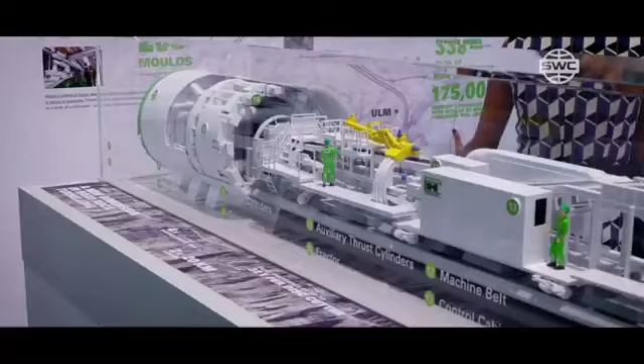Even the smallest business is a very serious and responsible process. In a small business that has been thought through to the smallest detail, there always arise situations that change the course of events and disrupt the plans. Say nothing of medium and large businesses, which consist of a thousand little things that should be developed and managed in a planned and purposeful manner.

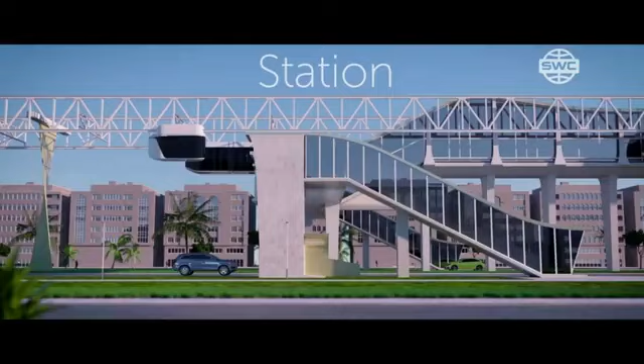In 2015, Unitsky String Transport existed only in the scientific works of its creator. Implementation of the technology into life began with a startup under the Skyway brand, in which few people believed at the time. Today, in 2022, Unitsky String Technologies Inc. is an international engineering company that designs, builds, and maintains innovative flyover transport solutions.

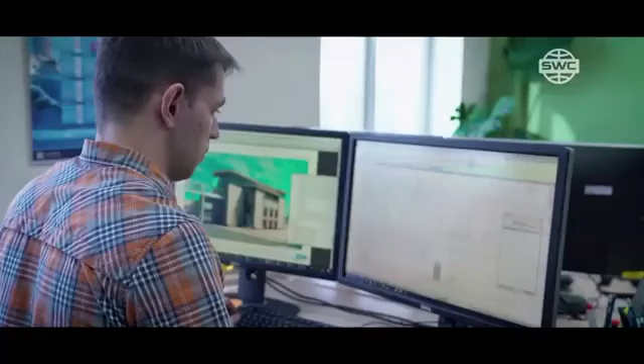The company is headquartered in Minsk, Belarus. It has its own development centers, production facilities, as well as two testing sites in Marina Gorka, Belarus, and Sharjah, United Arab Emirates. More than 700 specialists of various profiles, engineers, constructors, planners, designers, technologists, logisticians, builders, economists, and others work here. They are professionals with excellent education and experience of serious projects.

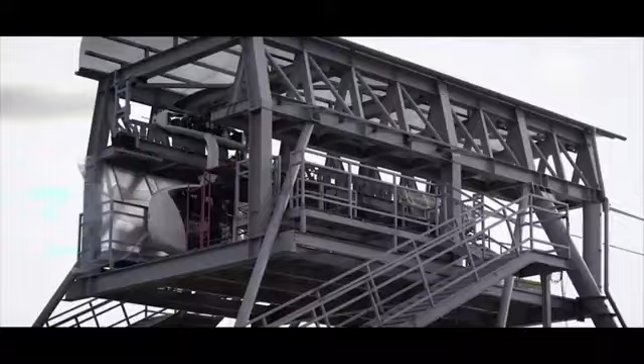Let us now go back to the recent past in order to understand how the company worked under the conditions of the pandemic, and see how it works now under the conditions of sanctions for the Republic of Belarus.

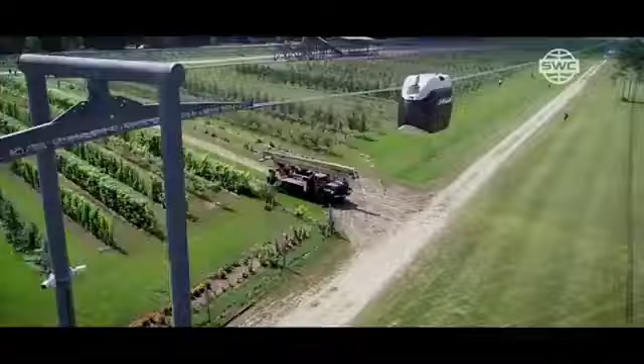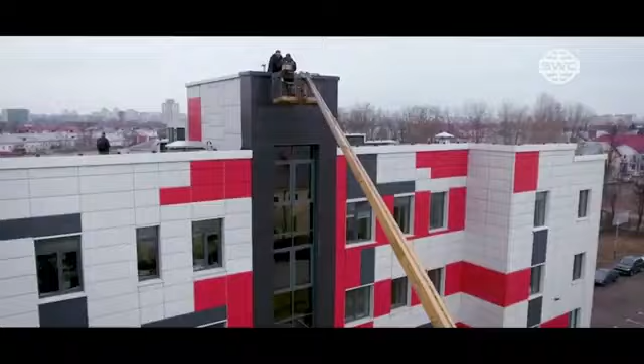Let's agree that 2021 wasn't a happy year for the world, and many medium-sized businesses closed down, including a number of those that were suppliers to Unitsky String Technologies Inc. It should be noted that the company is tied to suppliers in dozens of countries, who supply high-strength wire, high-strength steel, various polymer materials, equipment, and other component parts. That is why we had to look for new companies and new suppliers.

Some deliveries were delayed for a year, and even a year and a half. In the prevailing circumstances, the company's management has carried out an optimization to keep the team and retain its most valuable staff.

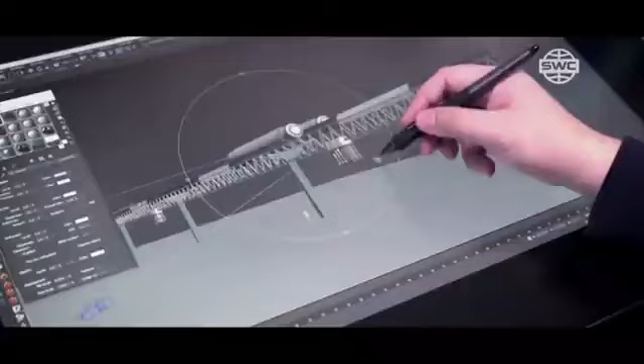Unitsky String Technologies Inc. did not only make money from the string technology before, it has also continued to do so under the conditions of the pandemic. The manufacturing company has a strong production facility, so Unitsky String Technologies Inc. acts as a contractor for external companies from various countries. This helps to finance the technology, support the team, pay salaries, and so on.

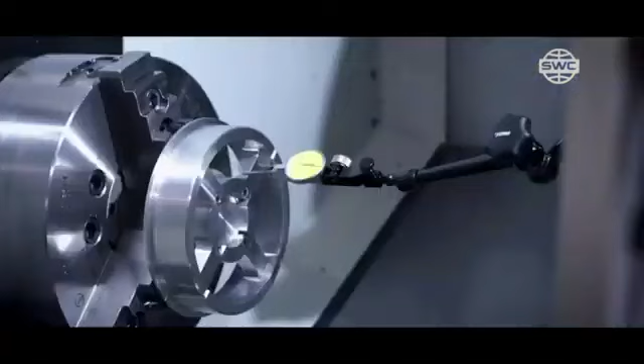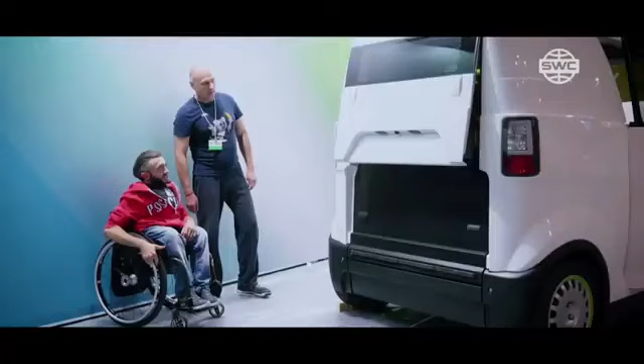As an example of the products that Unitsky String Technologies Inc. manufactures on site, we can mention an order for an electric car that was designed by a large Russian car manufacturer, but they could not produce it. That quite expensive order was placed with Unitsky String Technologies Inc. The customers were amazed at the high quality of workmanship. This electric car was presented to Russian President Vladimir Putin.

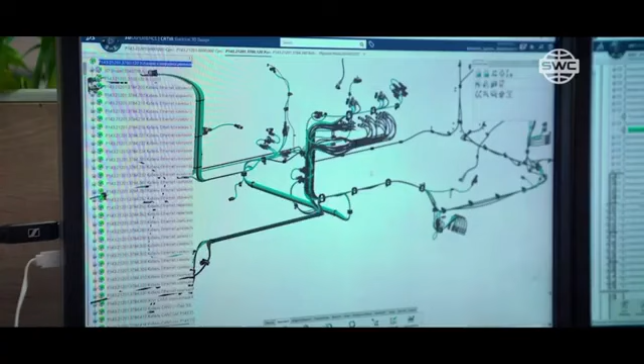The company also has a fairly large design department, and its specialists design buildings and structures at customers' orders. Thanks to outside orders, the financing of the team at String Technologies Inc. does not depend on investments. The team earns its own money.

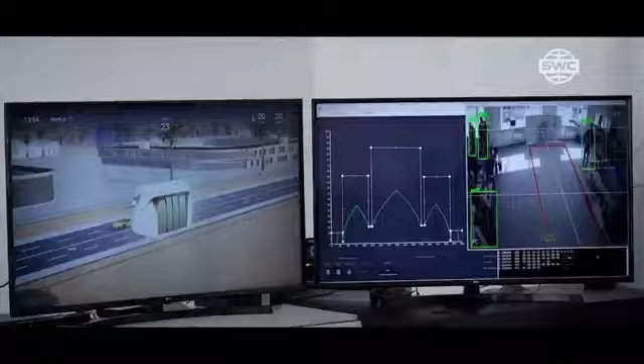According to Anatoly Eduardovich Unitsky, orders are numerous, worth millions of dollars. "We have survived in this madness, and what's more, we are developing, improving, and growing," said Unitsky.

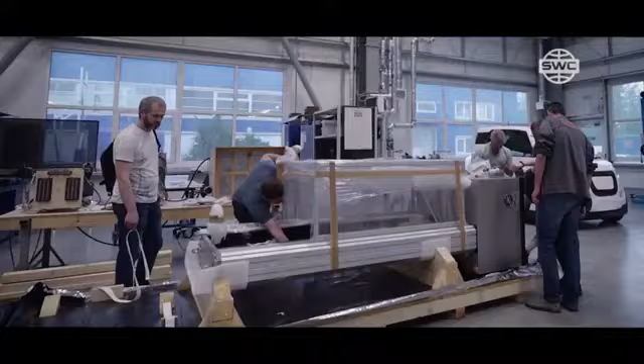All this is being done in order to achieve the main objective: to bring the technology to the global transport market. For six years in a row already, the company developer annually publishes the results of its own economic activity on its official resources. Last year was no exception, as can be seen in the publicly available documentation.

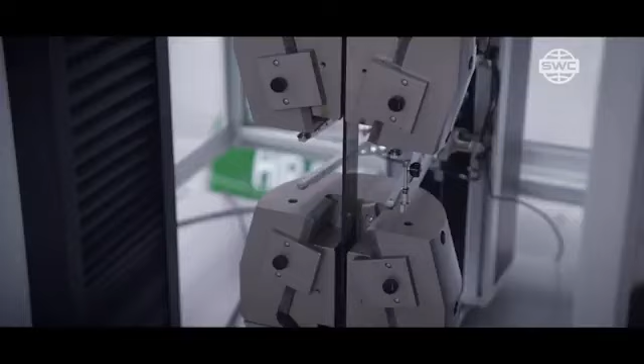According to the auditor's opinion, the attached financial statements of String Technologies Inc. fairly present, in all material respects, the financial position of the company, as well as the financial results of its operations, and changes in its financial position for the year, in accordance with the legislation of the Republic of Belarus.

An important development was the news from the Belarusian Chamber of Commerce and Industry, BCCI, that Unitsky String Technologies Inc. has been included in the Register of Business Entities. Membership in the Belarusian Chamber of Commerce and Industry is evidence of the company's reliability and stability, which is a strong recommendation in business circles in Belarus and around the world, thus increasing the company's opportunities.

Unitsky String Technologies Inc. also announced the completion of its rebranding, launched in 2020. The main reasons for which were a new stage in the development of the string technologies and the company's entry into the world market, as well as a return to its terminological and technological origins. The new company brand in English is Unitsky String Technologies Inc., formerly Skyway Technologies Co. until 2020. It combines both the original name of the technology and the last name of its author.

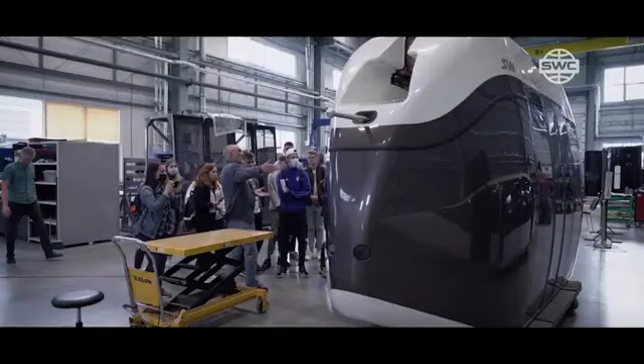Incidentally, it was all stipulated in the charter of Skyway Technologies Co. when the company was founded back in 2015.

Modern trade relations involve the obligatory promotion of goods and innovative technologies. For this purpose, several dozen, sometimes hundreds of trade exhibitions are held each year in every country.

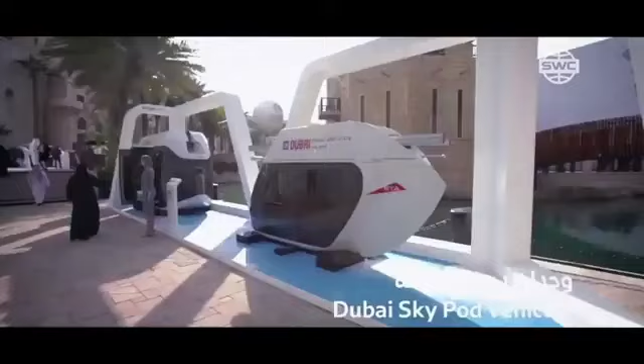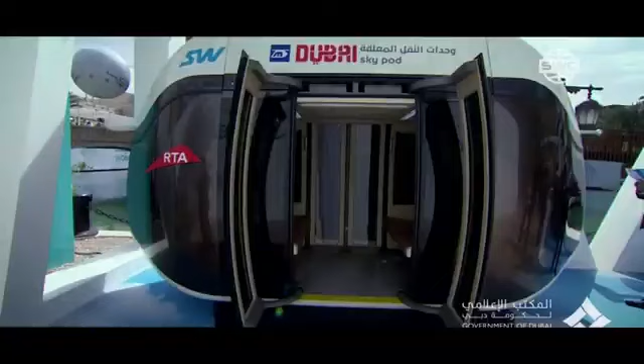At the end of 2021, the string transport was presented at Expo 2020 in Dubai, followed by a number of high-level government and business representatives from different countries visiting the Skyway Innovation Center in Sharjah. These include delegations from the United Arab Emirates, Saudi Arabia, the Dominican Republic and the Republic of Haiti, Nigeria, El Salvador, Colombia, the Czech Republic, Vietnam, Russia, Brazil, Switzerland, Rwanda, and other countries. It is possible that during some of these visits, commercial projects have been agreed upon which the public will find out about later.

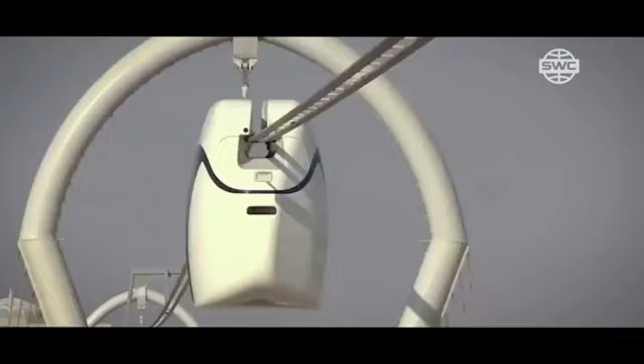New Delhi hosted the major international technology exhibition Smart Cities India Expo 2022. Unitsky String Technologies Inc. participated in this large-scale event, presenting an unmanned and environmentally friendly string transport that is most relevant to today's requirements. Companies from India, China, Singapore, USA, Brazil, France, Sweden, Germany, and many other countries also exhibited at the exhibition.

Major trade exhibitions attract almost all major customers and manufacturers, and this offers great opportunities for exhibitors.

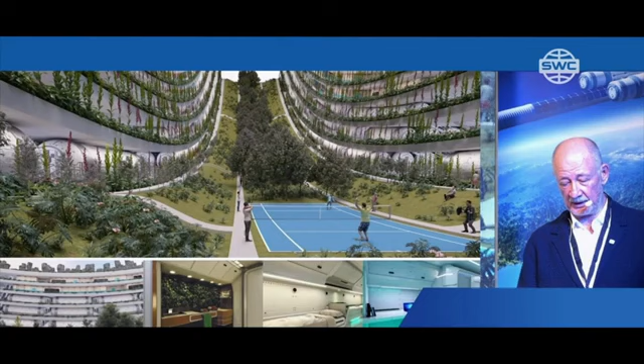Another important event took place in Mariina Gorka, where the 4th International Scientific and Technical Conference Rocket-Free Industrialization of the Near-Earth Space: Problems, Ideas, Projects was held, which gathers scientists and researchers from engineering, environmental, biological, social, economic, and political fields, whose developments contribute to the active development of outer space.

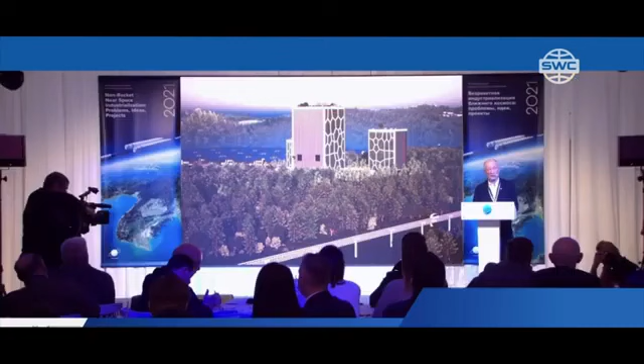The event was organized by companies Astro Engineering Technologies and Unitsky String Technologies Inc. The scientific partner was the Belarusian State University of Transport. The conference was attended by delegates from Belarus, Ukraine, Russia, Great Britain, Germany, Canada, United Arab Emirates, Saudi Arabia, and other countries.

At this conference, there took place a premiere of the film Video Message of Anatoly Unitsky to the leaders and peoples of independent nations.

Scientists are sounding the alarm. In the near future, the limits of population growth and biosphere carrying capacity will be reached on planet Earth. As an alternative to the coming collapse of human civilization, some suggest exploring Mars, while others suggest reducing the world population to a golden billion.

However, Belarusian engineer and inventor Anatoly Unitsky proposes an alternative solution: to carry out rocket-free industrialization of near space by the middle of the 21st century and to move there all ecologically dangerous parts of the Earth's industry. The film is stunning and leaves a lasting impression on all who watch it.

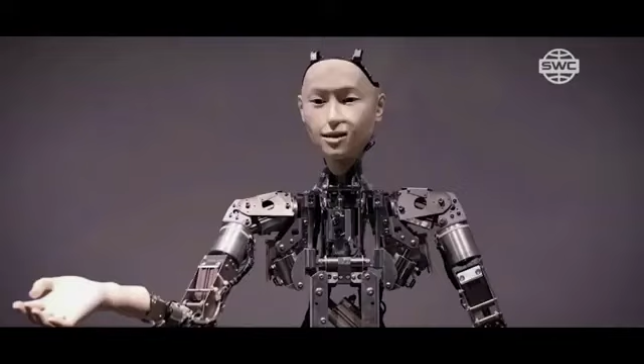The company developer of the string technologies is keeping investors informed about the active development of the Middle East branch, which is at the forefront of commercialization of the project.

Last autumn, the developer of the String Technologies was able to rejoice everyone with the long-awaited news. The reputable international certification body TÜV-SW Standardization Certification issued a certificate of conformity, confirming the safety of innovative infrastructure solutions for the string transport.

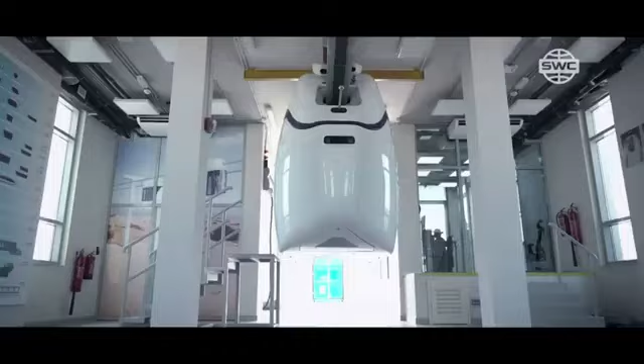As part of the certification of the first test track, this organization recently completed a comprehensive safety certification of all components of the string transport and infrastructure. Not just the rolling stock, but also all structural elements, such as the track structure, stations, and supports.

In doing so, the two anchor supports simultaneously comprise a service station and a passenger station. The fact that the technology was certified as a complex has been cited by Unitsky as one of the major achievements of 2021.

More recently, the construction work on the freight and passenger station and the freight and passenger terminal has been completed, which means that the longest and most time-consuming construction phase of the fourth test track at the String Transport Testing and Certification Center in Sharjah has been completed.

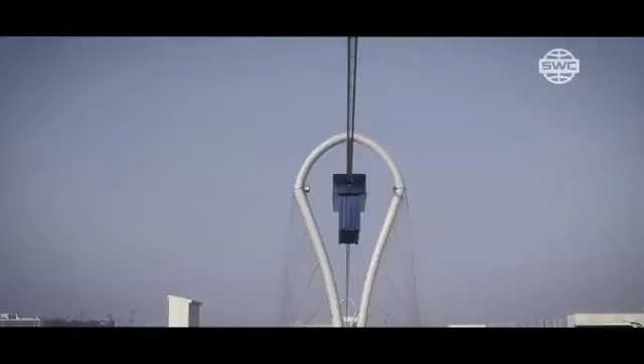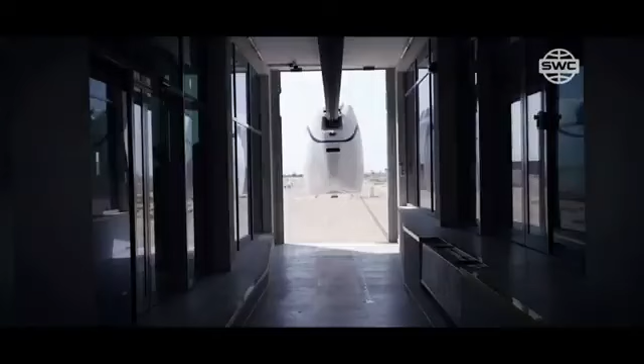Construction work continued for several months, during which time over 2,000 cubic meters of heavy concrete were poured into both stations, and over 300 tons of high-strength steel reinforcement were installed. The freight and passenger station and the freight and passenger terminal are structurally important elements of the string transport and infrastructure complex, combined with the 2.4 kilometers anchor supports of the freight and passenger track for the suspended rolling stock.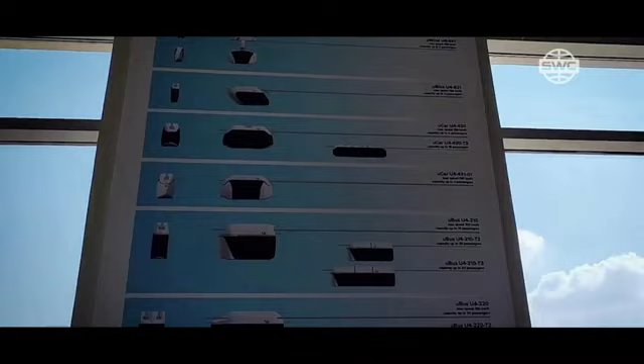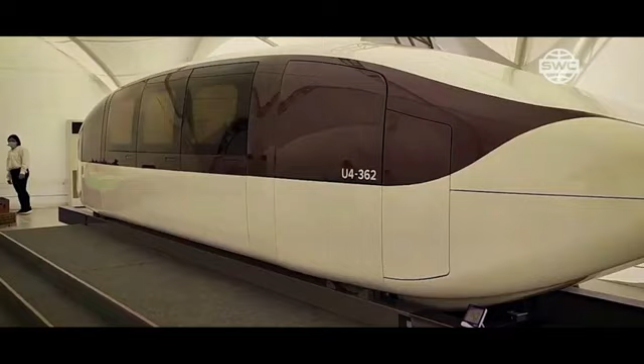They are designed and built to support passenger and freight transport. Unitsky String Technologies Inc. offers the transport market an already tested complete product ready for daily operation in tropical conditions, comprising of a string rail flyover, passenger stations, dispatch room, power supply, communication and automated control systems, passenger and freight trains in tropical design.

Blockchain technology is being actively implemented to link control, ticketing, traffic, monitoring and safety systems of the string transport.

In his New Year's interview, Anatoly Unitsky said that 4 contracts had been signed. There is a confidentiality agreement with the customers that they would like to announce these projects themselves, so no specific countries have been announced yet. All we know is that they will be placed in Asia, Arab countries, and the Eurasian continent.

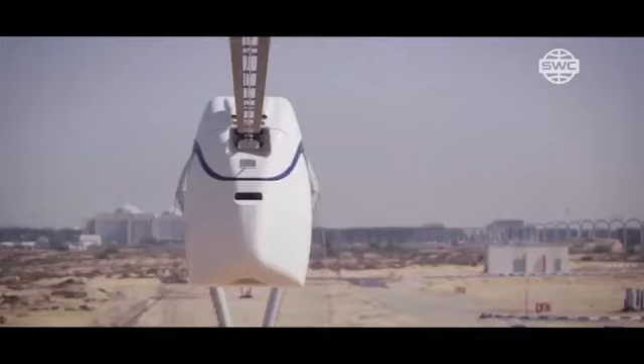The projects are there and are already being paid for. Work is now going on business plans and pre-project studies. The contracts will be announced when the company reaches the design stage.

The developer of the String Technologies is constantly working to improve its transport and infrastructure complexes. Tests are carried out regularly. The company's experts are working on improvements and are now working on the 5th generation to enter the market with it. Better, faster, higher quality, cheaper is the developer's main goal.

The Unitsky String Technologies group of companies include a number of companies, 3 of which are located in the United Arab Emirates. One of them is a marketing company, or to put it simply, a sales office. This company is new, although it has been in the management's plans for a long time.

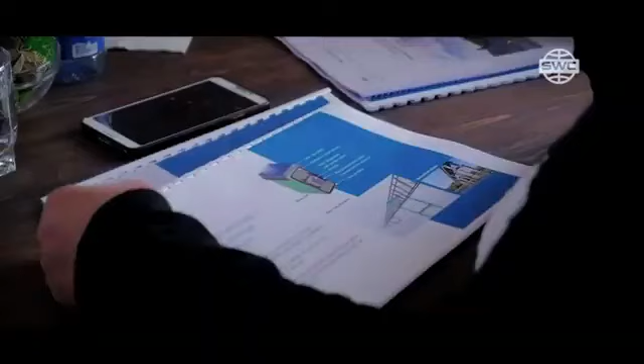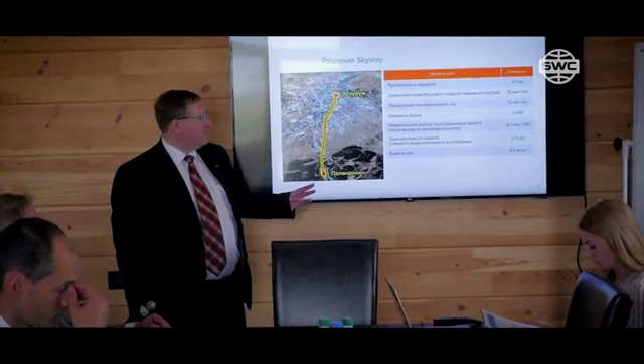In the United Arab Emirates, the tax policy is very different. There, the value-added tax is only 5%. There is no payroll tax, no profit tax. If you take all orders for the company Unitsky String Technologies Inc., you have to pay high taxes on profits.

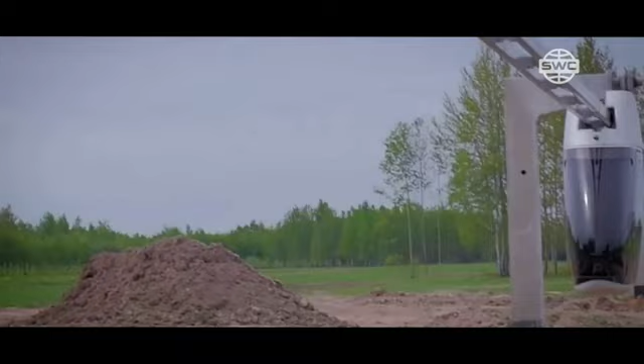In light of recent events, there have been problems with depositing money. To withdraw money and pay investors abroad is almost impossible here. The sales office in the Emirates faces no such problems, and from the point of view of investment attractiveness, it is very

advantageous. The company's management is not just thinking about today, but calculating all options, preparing a solid foundation for business and investors for years to come.

The development of the string transport company developer continues as planned. That was announced by Nadezhda Kosareva, CEO of Unitsky String Technologies Inc. Here is her quote: "The project continues to develop.

We have already purchased the necessary materials, which are enough to complete all the planned works in Belarus for this year. Any possible supply disruptions will not be a problem for us. In its turn, there are no supply problems in the United Arab Emirates either. All the agreements with our partners remain in force."

As we can see, the project is continuing to develop despite everything. This is due to well-thought-out management, coordinated teamwork, and the support of investors.

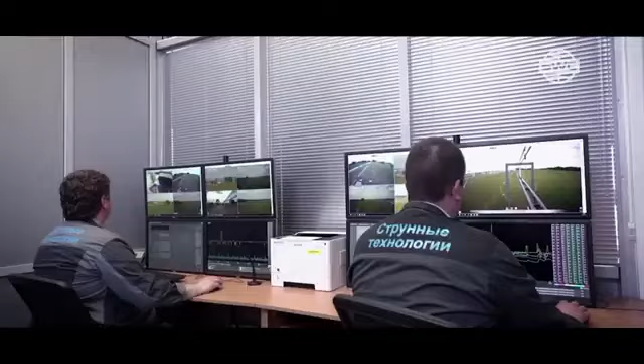There are companies that have the psychology of success and, regardless of the circumstances, pursue their goal and achieve it, no matter what. This is because they are run by people who have the psychology of success. They are confident and see themselves as winners, no matter how their lives turn out.

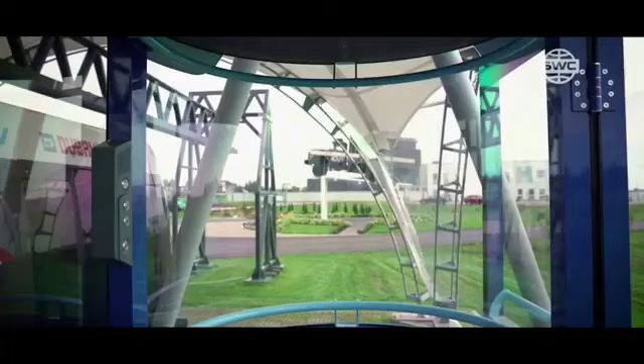Such a company is certainly the international engineering company Unitsky String Technologies Inc., headed by Anatoly Eduardovich Unitsky, who, regardless of any circumstances, goes forward with its main mission: build Skyway and save the planet.